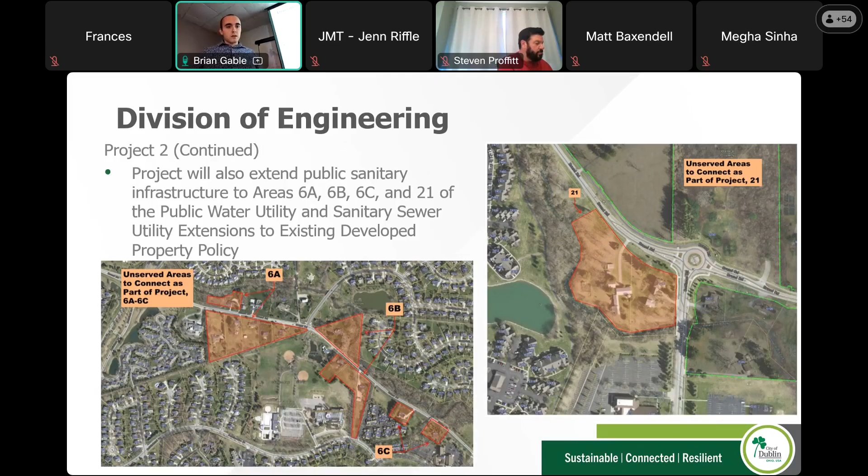That's pretty much it. Next is, it would seem, Josh, and he's coming over here. He's on his way. Everybody stand by. He's going to do a great job. All right, he's here now.

So project number 3 is the city's annual pedestrian maintenance program. It's a fairly straightforward program this year. We have 4 bridges that we're looking to maintain with the completion date for all 4 bridges of November 14th and a design budget of $22,000.

The first bridge shown here is located in the previous Riviera Golf Course area. We've noted it as Riviera. It's located on an existing path northeast of Firenza Place. And really the only work that we're anticipating here is the replacement of the deck boards and replacement of the railing, bringing the railing up to city standards.

In addition to that, because it is a steel beam bridge, we're expecting to paint the bridge per City of Columbus standards.

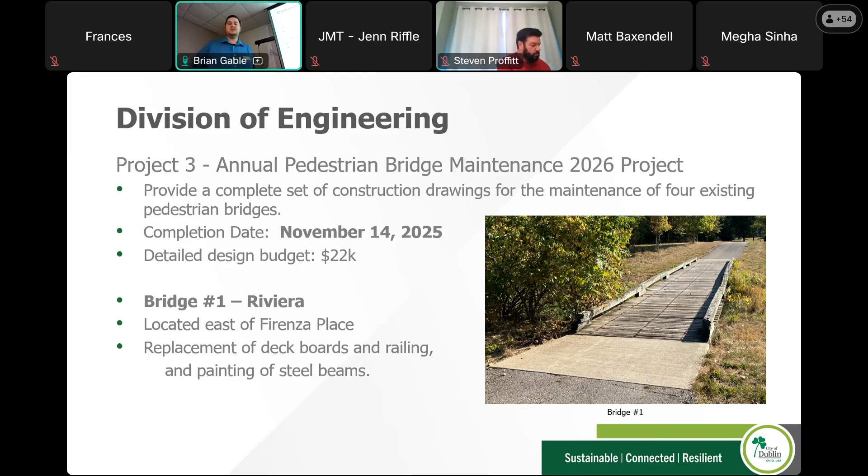Bridges number 2 and 3 are kind of a combination. They're 2 bridges located off Avery Road, roughly across from St. Brigid, very close together. Bridge 2 runs parallel to the right-of-way in the city's right-of-way, where Bridge 3 serves as an offshoot into St. Brigid's green space parking lot area.

Bridge number 2 has some existing spalling on the concrete abutment that we'd like to get repaired, in addition to replacement of the railings. Bridges 2 and 3 are both to be painted to match existing, where the only work on bridge number 3 is for it to be painted.

Finally, we have bridge number 4, located in the Hutchins open space, a city parkland space off Sawmill, towards the northeast of the city. You can access the location by Shropshire Circle, or you can go north of, I believe it's Woodland Hill Drive.

Bridge number 4 is a little unique in that it's in a very wet, moist environment. We've noticed some rotting issues along the bridge that we'd like assessed, to figure out what needs to be done to maintain it. If you look closely, in the bottom right corner of bridge number 4, you can see that part of the substructure is rotted away entirely.

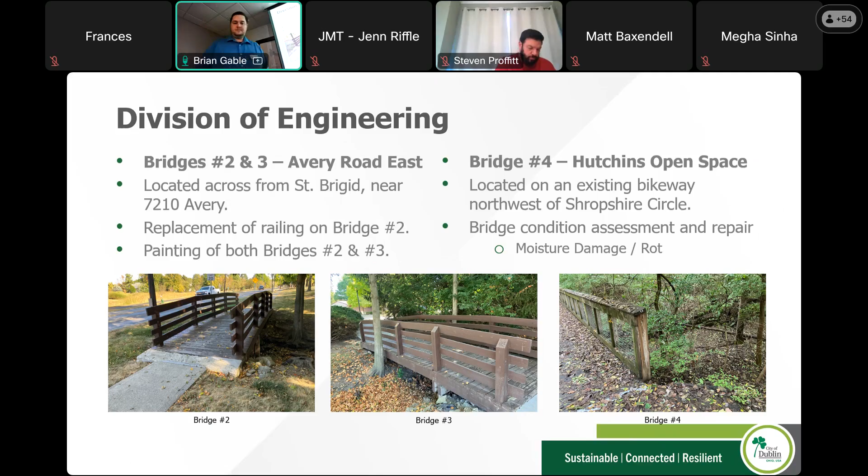Project number 4 is for signal maintenance for Emerald Parkway and Dublin Road. The city is planning to bring all of the traffic signal infrastructure in this intersection up to current city standards.

In addition, the city is looking to replace the 4 existing curb ramps. Right now there are 4 diagonal curb ramps at each of the 4 corners, where the city would like to bring it up to current standards, in addition to the goals of Envision Dublin. So we're looking to replace the 4 curb ramps with 8 perpendicular ramps.

We're also trying to make this intersection more pedestrian and bikeway friendly. We're looking at options to shorten the distance between corners, make it easier to traverse for pedestrians, and provide pedestrian refuge spaces. Essentially, we're looking for options to make this a safer, friendlier environment for pedestrians and bikers. The completion date for this project is October 7th, with a budget of $75,000.

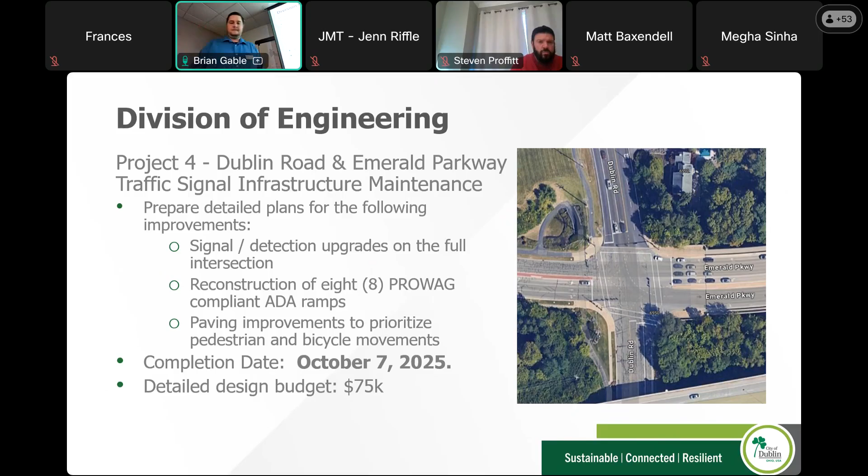I think that's it. Tina?

Thanks, Josh. I'm Tina Waskowitz, Division of Transportation and Mobility. So here we are on Transportation and Mobility projects.

The first one we're super excited about. We've had a big effort with our planning division to update the way we look at transportation in the city. If you haven't checked it out yet, Envision Dublin is the new updated community plan, and Chapter 7 is focused on mobility and transportation. There are a lot of new and great ideas in there, the biggest being: what do we do without level of service?

If we start to focus on pedestrians and bicyclists as our top priority, what does that mean for our transportation network? How do we set up the space in the right-of-way to really accommodate those users first, and show that they are our most important folks in the right-of-way?

In order to really execute this paradigm shift, we also need to support it with how traffic studies are being done from the private side. So when we do our traffic impact studies, we take a look at what those impacts are on the network. We want to figure out the best way to improve that network under this new paradigm. There are some references noted.

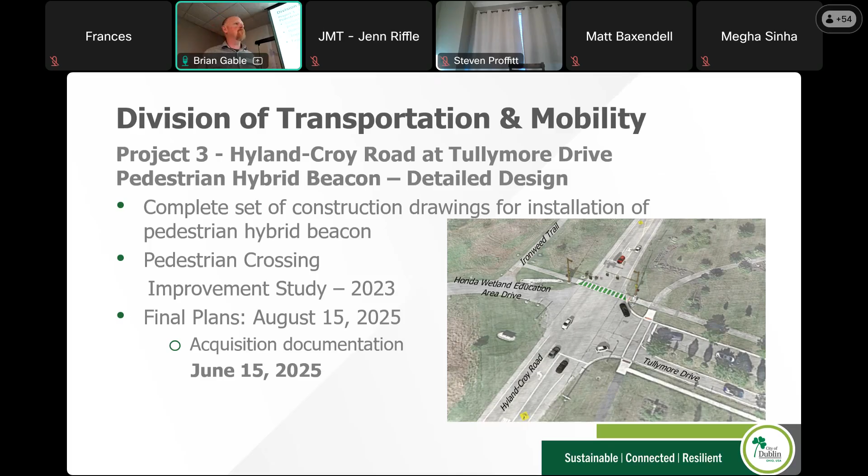Final plans for this, we're looking for August 15th, with any acquisition documentation, legal description, stuff like that, two months prior on June 15th of 2025. And that's that one. I'll give it to JM.

Good morning, everyone. So the final project for transportation mobility is our general task order project. This is for a consultant to respond to various requests that we may have as staff. Currently, the projects that we're working on for the general task order include signal timing at intersections, as well as updating our bikeway facilities and policies.

So that's an example of some of the projects that we'll be asked for a consultant to help us with. And then the contract is slated to expire in March of 2026. Thank you.

Oh yes, thank you. The question is in regards to the completion dates of the 2 sanitary projects. Project 1, that's meant to not only be the preliminary work, but also through the full design. I was trying to recall, does Project 2 have any preliminary aspect to it?

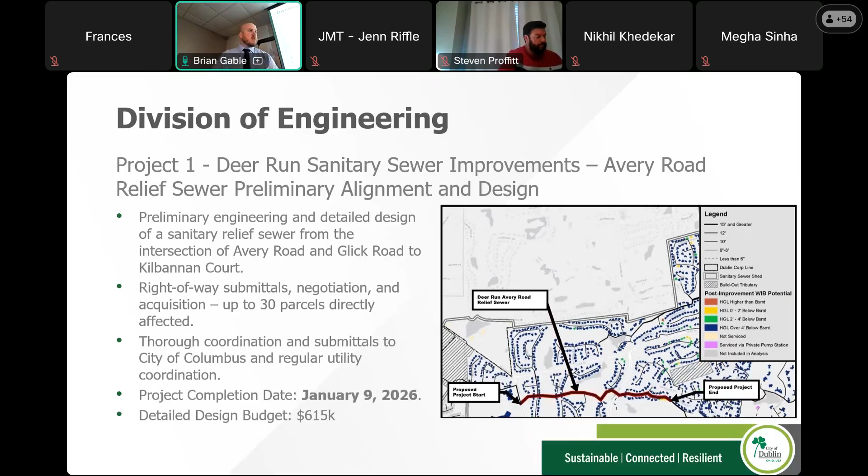Yeah, it has a little bit as well. So that's the full, that completion date is the full construction bid set. So the schedule should kind of look at that and work through. Most of the preliminaries have kind of been done. Now it's kind of trying to take a more detailed look at it and truly get really what we're looking to do for alignment and actual approach to it.

Is it replacement? Is it parallel? Is there an option that maybe we didn't think of, or wasn't available at the time the study was performed? So trying to take a quick look at that since the study is 12 years old now. Just trying to make sure we're caught up there.

Go ahead. Those 2 dates though do not include the property acquisition necessarily. It's so generally speaking, yes. The 2 dates, do they include property acquisition? Our intent is to try to have the acquisitions performed during that time period. So for us, historically, once we feel that the alignment is pretty well set, and we don't anticipate adjustments to that, we'd like to move forward with the acquisition process.

So sometimes that's not until we get to 60% plans. Some things we have a pretty well set alignment. The sanitary, once we're truly set where we need to be and we have some of the vertical information figured out, I would think that we could probably start those a little before 60% in order to cut into some of that time.

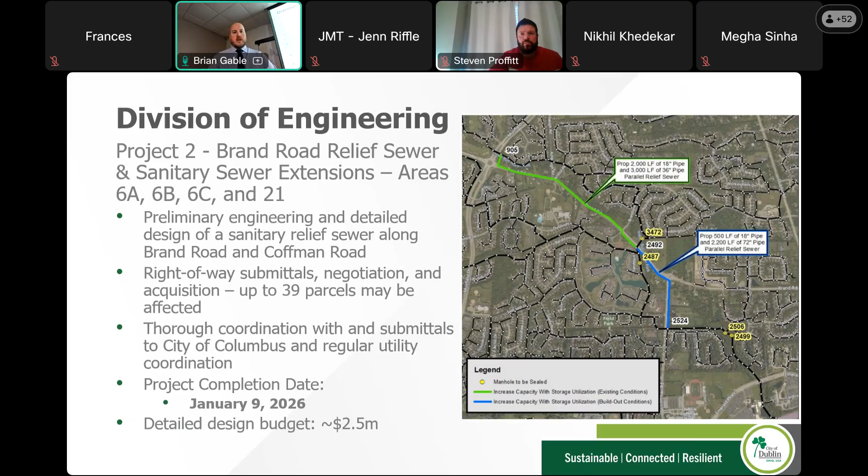Budget allocated for Tina's studies. Go ahead, Tina. Sure, I'll take the easy out and say it's in the bulletin so I don't contradict myself. But if we've already got a preliminary budget for any of the projects, I think that's true for engineering and T&M, it'll be in that project description for each project.

Perfect. So somewhere between 100 and 300 on those, the two specific studies that were asked about, but those budgets are included if we've got one. If we don't have a budget yet, there won't be one in the bulletin. Okay, thanks. All right, Jared, another one?

Yes, one more online. The question is, can you confirm that ODOT pre-qualification is required for all projects or just some? You want to go for it? Go ahead. Yes, repeat the question. The question is, is the ODOT pre-qualification required for every project in the bulletin?

I'm going to answer that no. The transportation and mobility projects will be dependent on the project type. So on the detailed design project that Mark talked about, I think it is important for the consultant to have the ODOT pre-qualifications. On the studies, it's less important.

You want to answer that for engineering? Yeah, on engineering projects 1, 2, and 4, I think we are definitely keeping ODOT pre-qualifications. I don't know that we have an issue with engineering project 3 if there's not an ODOT pre-quals for those, since that is more of a maintenance style project. So those plans are expected to be a bit simplified, obviously by the design budget. It's not exactly a huge fee, so it's meant to be kind of a limited approach to it and get the details of what we're trying to do out there so contractors can understand and move on with it.

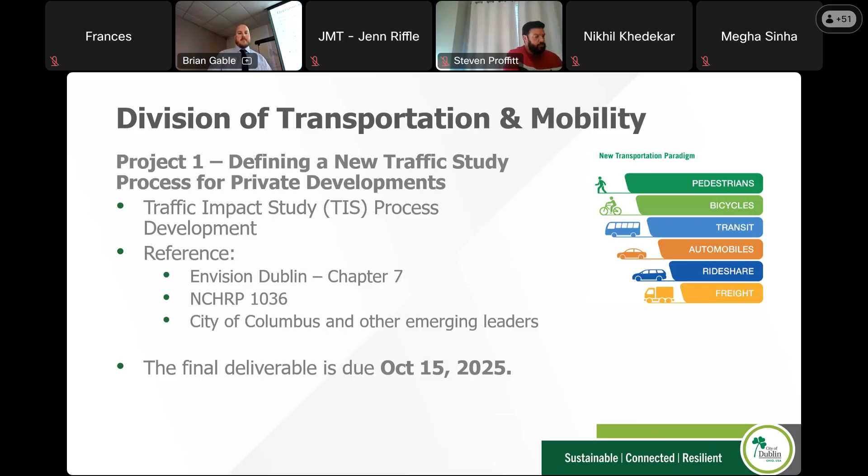Yeah, Tina, on project 2, for deliverables, it talks about 3D graphics and renderings and so forth. I just want to confirm that you're not thinking of standard drawings or engineered typical sections for these various street types, right?

Correct. The question is about the level of detail that we want to see in this document for project 2, which is the street typologies. This is not intended to be a detailed design type of drawing. This is illustrative, and to be able to use the guidance in this document to then go into a detailed design drawing. So we want this to be basically one step before your typical section in a construction drawing, if that makes sense.

Okay, any others in the room? Okay, did we have one online that I heard a little voice? Okay. Emily. Questions for the project managers after today? Are we allowed to reach out to them?

Yes, so the question is, if we have further questions, are we allowed to reach out to the project manager? Yes, we'll treat this kind of the same as bid questions. So the project managers will take your questions in. If it's something that doesn't really adjust or change anything, we may answer directly. If it's a very minor clarification or something we've covered already in this process. But anything new information, we would post out to everybody in an addendum to the RFP. So that's our intent. We're not trying to give anybody a leg up at all.

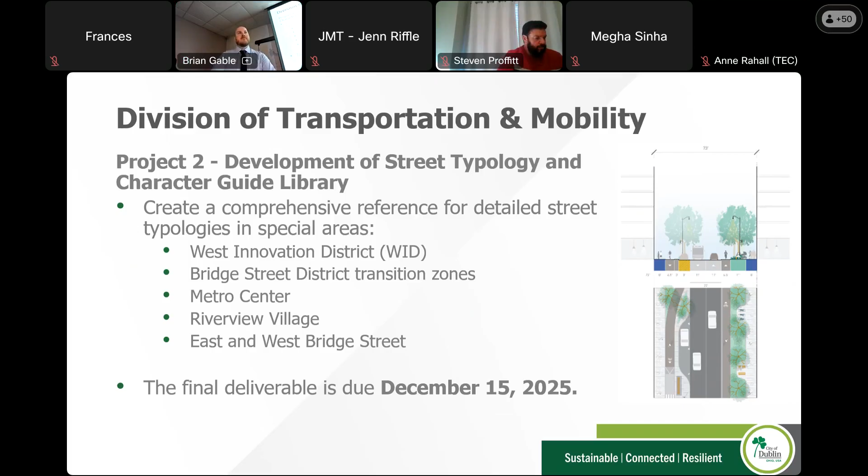Good question. Any others? Okay, online quiet? Everyone's quiet.